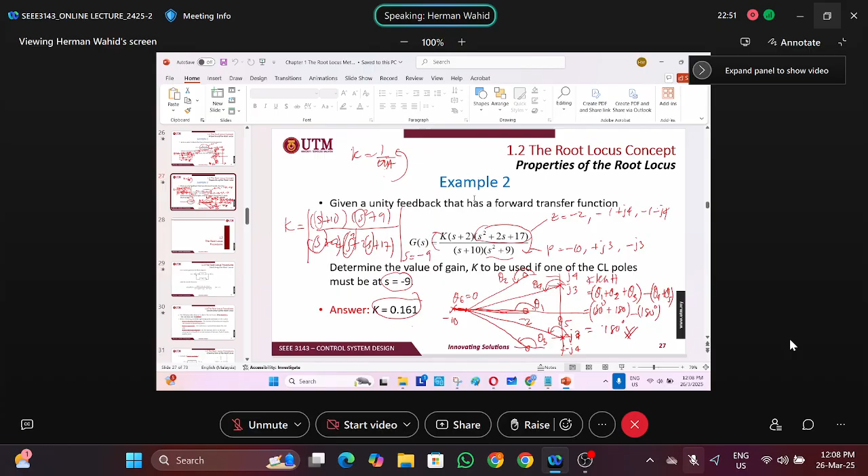Okay, so we continue with the real topic for this chapter, which is we're going to do the sketch of the root locus. The sketching is divided into two parts.

It has two parts in the root locus: one is the sketching part, and the other part is the refining.

In sketching, we have 5 rules that need to be followed. And for the refining, we have another 4 rules - rule number 6 to rule number 9.

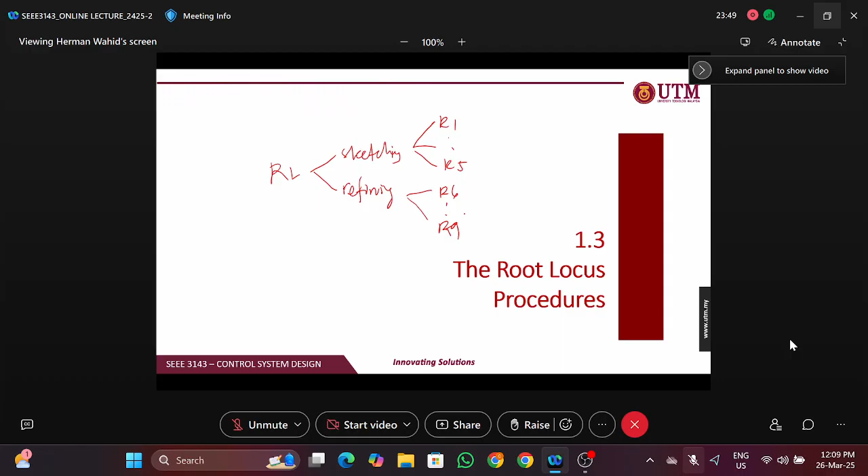So we start on sketching the root locus. Let's consider this closed loop block diagram, or the feedback block diagram. So we have the forward transfer function as KG and the feedback as H(s), right?

And the transfer function can generally be written like that, where in the numerator part we have the gain K and also a list of the zeros: s plus zero number 1, up to s plus zero number m. The numerator is for zeros and the denominator is for the poles: s plus pole number 1, s plus pole number 2, up to s plus pole number n.

So the rule for sketching the root locus - we should make sure that the number of zeros should be equal to or less than the number of poles. It cannot be that zeros is greater than the number of poles; at most it should be exactly the same number.

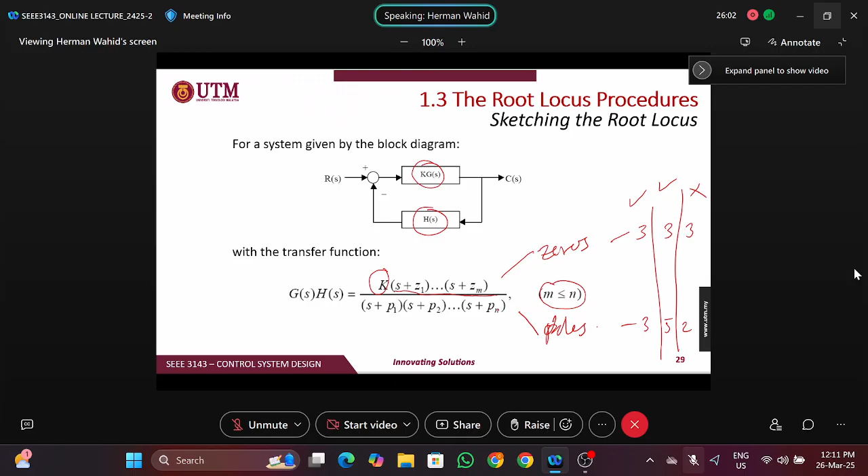So, as I mentioned, we have two parts: one is for sketching, and the other is to refine the sketch that we have drawn. We start on the first three rules.

So rule number one states that the number of branches is equal to the number of closed loop poles. For example, we have the forward transfer function given by K over s plus 2, s plus 3, s plus 4.

s plus 4. So we know that the number of poles is equal to 3, and basically this is for the open loop transfer function.

If you convert it into the closed loop transfer function, we should use the KG divided by 1 plus KGH formula.

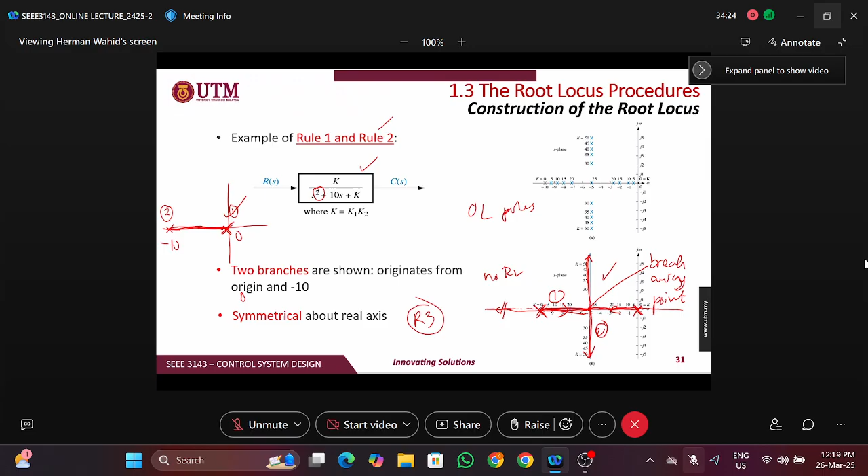So the statement from rule number 3 says there will be a segment at the left of the odd number. In this case, the odd number is located from this pole at the origin, so from here to the other pole, there will be a segment. This segment becomes part of the root locus. That's why the root locus goes through this segment rather than going to this side, because on this side there will be no root locus.

Let me look into another transfer function to represent rule number 3. In this case, we have zeros at -3 and -4, and poles at -1 and -2. If we locate all those zeros and poles on the axis, we have poles at -1 and -2, and zeros at -3 and -4.

Okay, represented by the circle. So if we count this, all the poles and zero on the real axis, we should start from the right: 1, 2, 3, 4. So that means we should consider there will be a segment or a few segments at the left of the odd number.

So we have 1 from this odd number. So it goes to the next poles. It doesn't mean it should go to the poles. Sometimes it goes to the zero here. But for this case, we have another pole at the left.

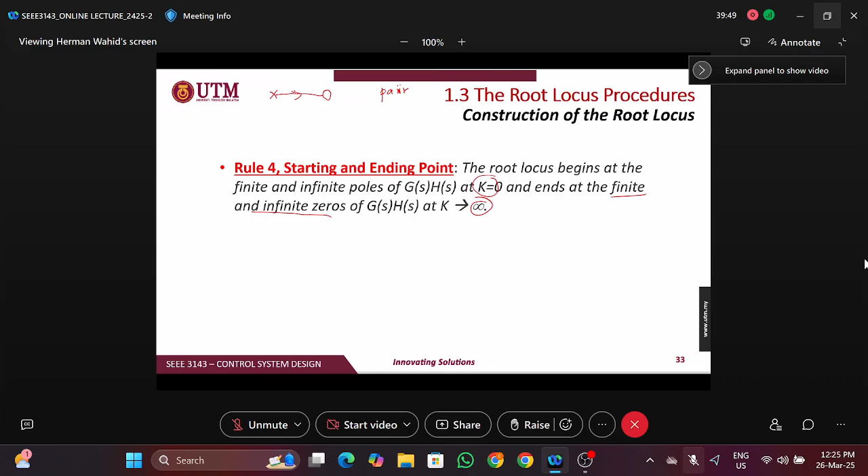Okay, for this case, it is a complete pair because we say that it is a finite pole, and this is also a finite zero. What does it mean by finite here? So this is only one.

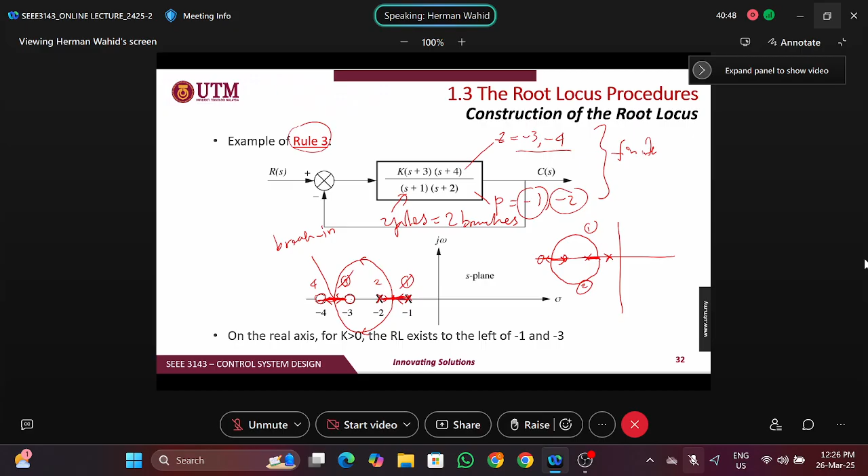Finite pole and finite zero means that - if you consider back this one, so here all these poles and zeros that exist on the transfer function, we consider as finite poles and zeros. Okay, and the poles or zeros that do not exist on the transfer function, we call it infinite.

Okay, so as I said just now, this is the first possibility. The second possibility could be from the pole and then it goes to the zero at infinity. So it doesn't have the finite zero here. So this is infinite. Okay, but the poles here are still finite poles. So that is the possibility.

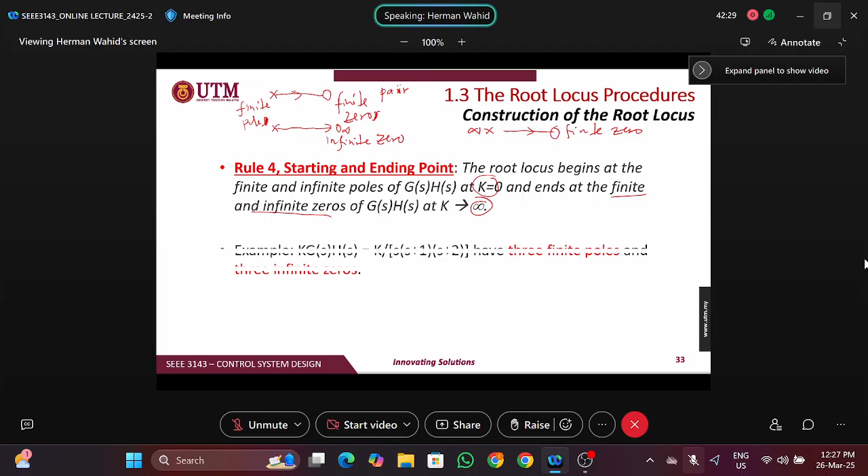Right. Later we'll look into an example to be more clear on what this means here. Okay, so we consider this transfer function: k over s(s plus 1)(s plus 2).

So we have nothing at the numerator - no finite zero. Okay, we have no finite zero, because we don't have anything at the numerator, but we have finite poles here. Okay, where the finite poles are located at 0, -1, and -2.

Right? So where are the infinite zeros? Okay, rule number 5 will help us to locate these zeros at infinity. Okay, all these poles still have their own pair, but in this case, all those poles are connected from the infinite.

Sorry, it is not like this. Okay, so this pole goes to the finite zeros. This pole also goes to an infinite zero. This pole - there are no finite zeros appearing here. Okay, so the zeros are located at infinity.

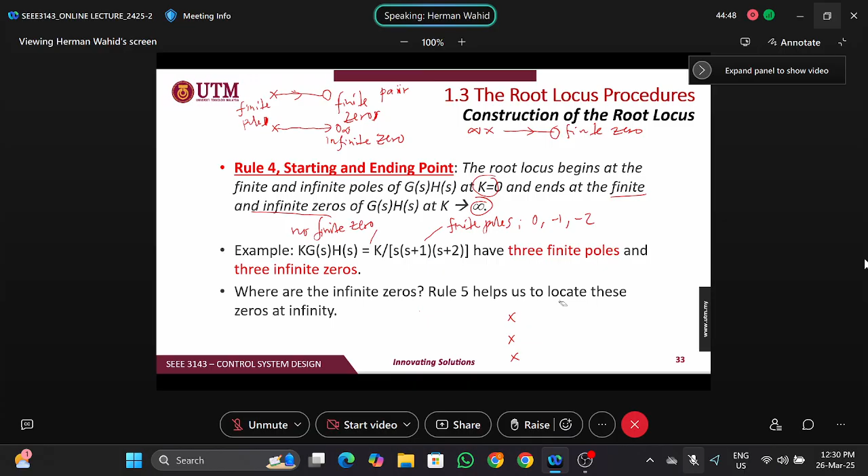Okay, this I have explained just now. We have this root locus. Okay, so one root locus goes like this and ends like this, and the other one goes like this and ends at the zero. Okay, so the poles go to the zero.

The poles go to the zero, and all those zeros and poles are finite zeros and poles. Okay, the root locus begins at the finite poles, which are -1 and -2, and ends at the finite zeros, which are at -3 and also -4.

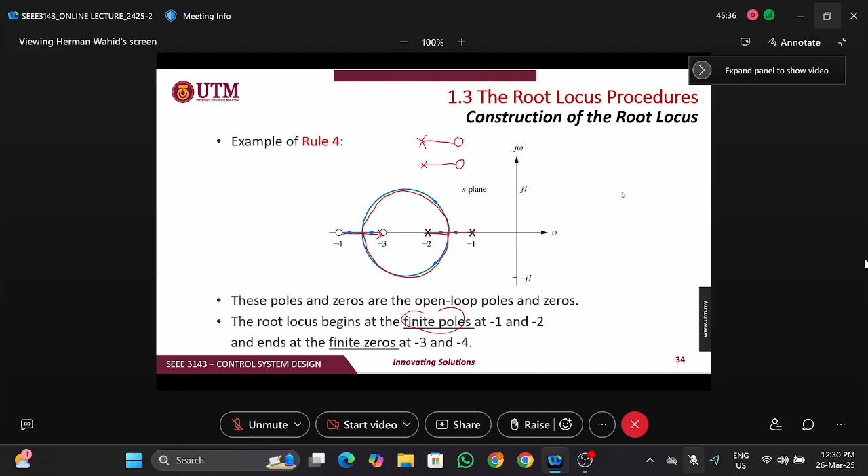Okay, so just now we are confusing on what is infinite zero and infinite poles. Rule number 5 will help us identify where the location of that infinite zero and poles are.

So rule number 5 says that the root locus will approach a straight line as the asymptote line when the root locus is approaching infinity. So basically, rule number 5 is to look at the asymptote.

The number of asymptotes is the number of poles minus the number of finite zeros. And the real axis intercept is at sigma A, where sigma A is given by the summation of finite poles minus summation of finite zeros, divided by the number of finite poles minus number of finite zeros, which equals the number of asymptotes. The third one is the asymptote angle, given by theta A equal to (2k+1) times pi, or it can also be written as (2k+1) times 180 degrees divided by the number of asymptotes, which is actually equal to this formula.

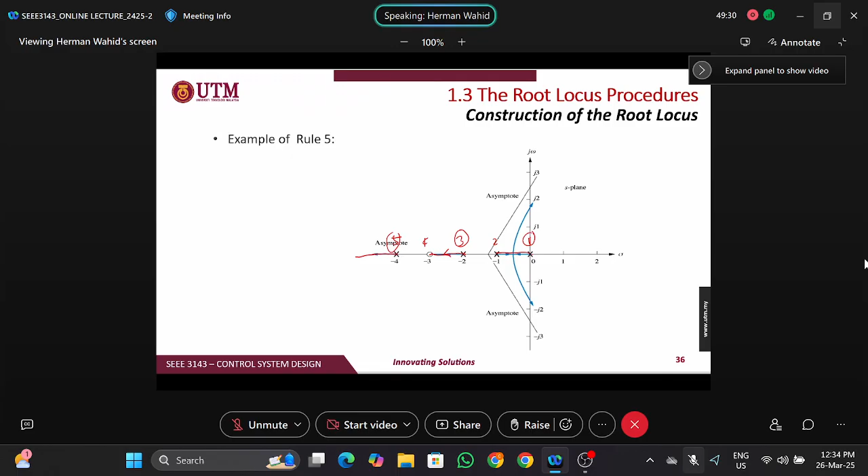We can see that this root locus is already completed, because we go to the left. The root locus is already completed because the pair is already equal, meaning the number of poles equals the number of zeros here, 1 to 1. So this one is completed. And this one is probably completed because it's not going to return back here.

It should go to the left toward infinity zero. So from this pole, as there is a segment here, it goes to the left and approaches zero at infinity. So this is branch number 1, this is branch number 2, and branches 3 and 4 are here.

From these two poles, one will go to the right because the segment is in between here, and another one goes to the left. So this is considered branch number 3, and this is branch number 4. They meet at this point here, so this point is called the breakaway point.

It breaks away, one goes to the upper side, and it tries to make a curve until it crosses at this j-omega crossing, and it exits toward the right side. Okay, supposedly not like this, it goes like this.

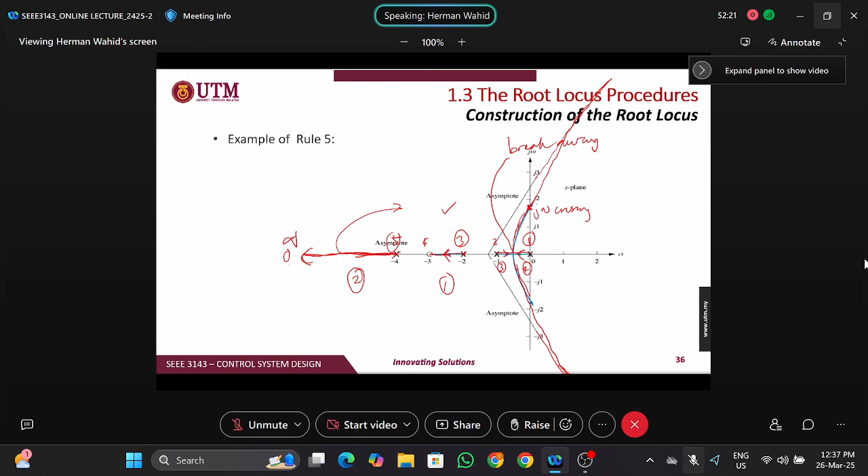Similarly for this one, let's say I extend this line. So this root locus goes to the right, and then finally tries to reach this asymptote line and follows this asymptote line. Okay, so that's what is mentioned by rule number 5.

That's what we try in this example, example number 3. So from here, let's try to identify rule number 1 about the branches. So how many branches do we have? 4, following the number of poles: 1, 2, 3, 4. So there will be 4 branches of the root locus.

Rule number 2 says symmetry, let's leave that for a while. Rule number 3, there will be a segment. So let's draw and place all those poles and zeros: 0, -1, -2, -4, and a zero at -3.

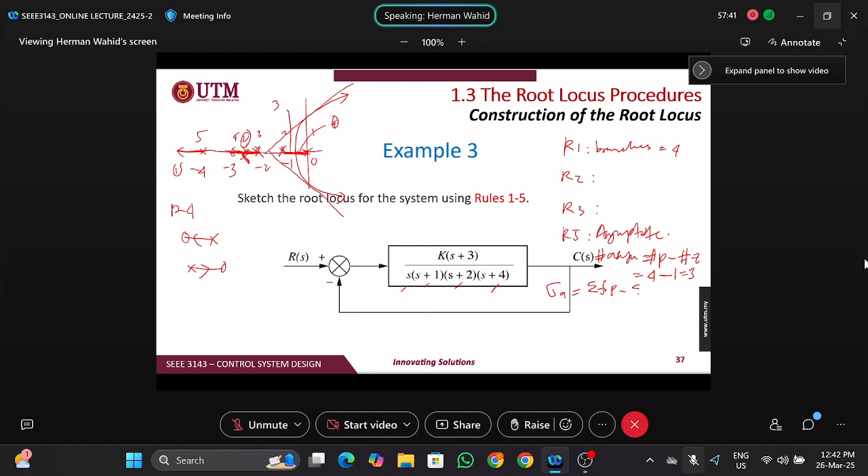The second one is, where is the location of the asymptote point? The sigma A is equal to the summation of finite poles minus the summation of finite zeros, divided by the number of asymptotes.

So in this case, we have the finite poles. What are the poles that exist from the transfer function? We have 0, plus -1, plus -2, plus -4, and minus -3, divided by the number of asymptotes which is 3. So overall we have, -4/3, which is -1.33 something. Okay, so this is the sigma A, or the asymptote point.

The third one is the angle theta, given by 2k plus 1, times 180 degrees, divided by number of asymptotes. So we have 2k. So what is actually k that needs to be used here? Okay, k is an integer number.

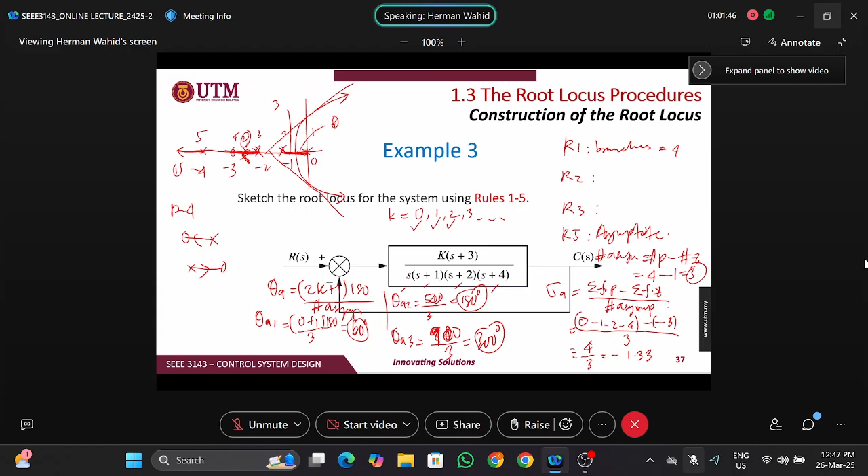Right? Theta A3 is, if you choose 2: 2 times 2 plus 1 is 5, times 180, which is 900, divided by 3, which is 300 degrees. So we have 3 angles here: 60 degrees, 180 degrees, and 300 degrees.

So just now we identified that the asymptote point is located at -4/3, or equal to -1.33, which is somewhere over here. Okay, so this is the starting point of the asymptote, all those asymptotes should start from this point. And we have 3 angles theta, which is 60, 180, and 300.

So if we consider this reference point, 60 degrees is started from here to here, so this is 60 degrees. 180 degrees from here to here. And 300 degrees is basically -60, or you can take the full one, here. Okay, this is for 300 degrees.

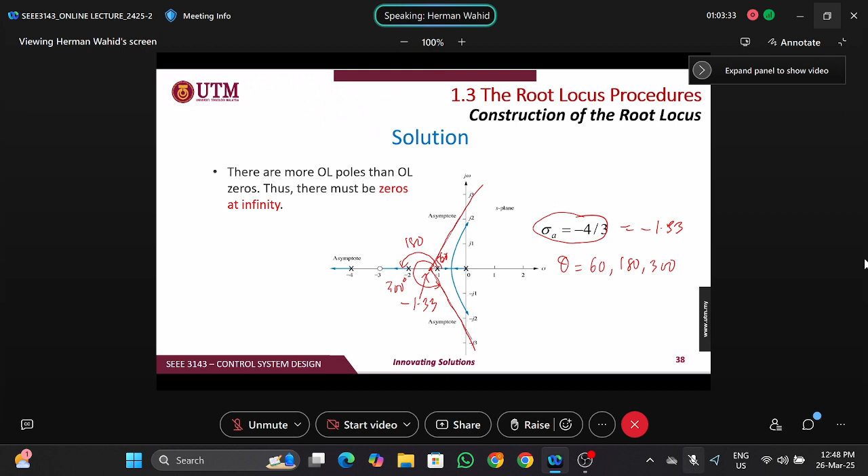Okay, then we draw the line. This is the asymptote line for this angle, 60-degree angle. We draw the line for 300 angle. So this is asymptote number 2. And the third asymptote is just 180 degrees. So the asymptote is like this.

So meaning that the root locus should lie on this asymptote line. As we can see here, just now we have settled with this one. This pole will go to this zero completely. And this pole here, just now we're unsure where it should go.

Of course, we know that there will be a segment here, but will it go straight to the left, or somehow go back, returning back, make a U-turn? But for this case, it's not going like that. It should go straight to the left because it is following this asymptote line just now. It is 180 degrees. So from here it goes to the left, to the infinity point, infinity zero.

For the other two branches here, as I mentioned just now, when it breaks away from this point, it will not go like this or like this, because it is breaking the rules. It will not cross this asymptote. It should finally follow this asymptote line.

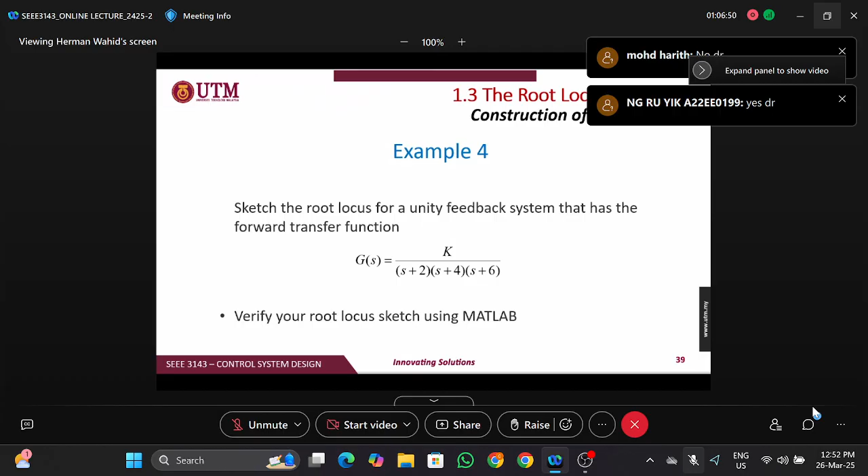Okay, thank you. So let's look into another example here. All right, good, thanks. Okay, these are quite similar examples.

Sketch the root locus for the unity feedback system that has the forward transfer function. So we need to go through all the rules from rule number 1 to rule number 5.

Okay, so we first identify the zero. We don't have any zero, not available. We have the poles located at -2, -4, and -6. If you try to locate all those poles and zeros, we don't have any zero, and -2, -4, -6. Those are the poles.

Then we have segments here, 1, 2, 3. So we have a segment at the left of odd number, and the odd number here, so we have another segment. We should understand from here, we can imagine that there will be a root locus here to the left, and there will be a root locus in between here, whether it goes to the upper side perpendicular or it goes to the right, crossing the j omega crossing point.

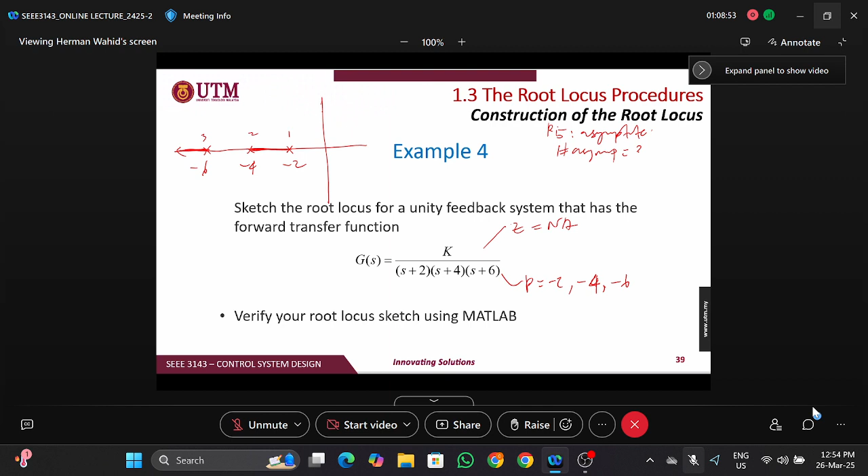Okay, let's identify next the asymptote point. This is rule number 5. So for the asymptote, the number of asymptotes equals the number of poles, which is 3, minus zeros, which is 0, so 3. So we still have 3 asymptotes, similar to the previous example.

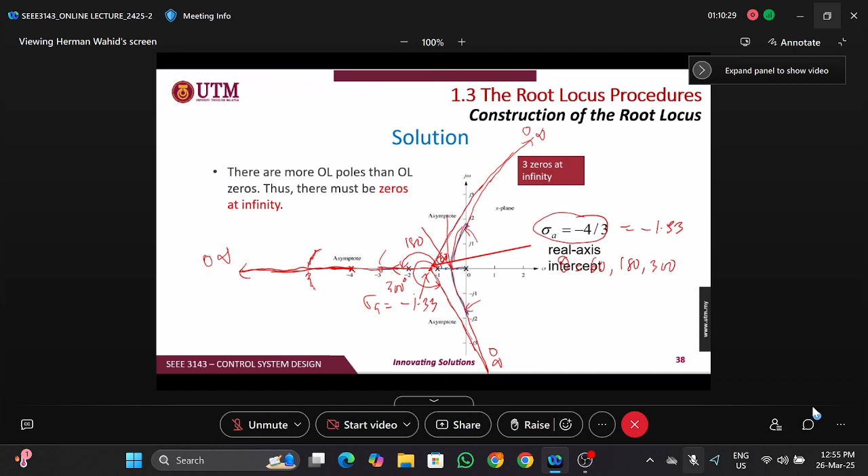Okay, so for now, the sigma A point is exactly located at one of the poles' location, which is -4. The previous one, we have the asymptote point, sigma A, at a different location, not part of the poles' location. But for this one, the asymptote point is exactly also located at the same point as one of the poles, which is -4. So from here, we draw the asymptote line at 60 degrees, the -60 degrees.

This is 60 degrees, -60 degrees, and 180 degrees. This to the left.

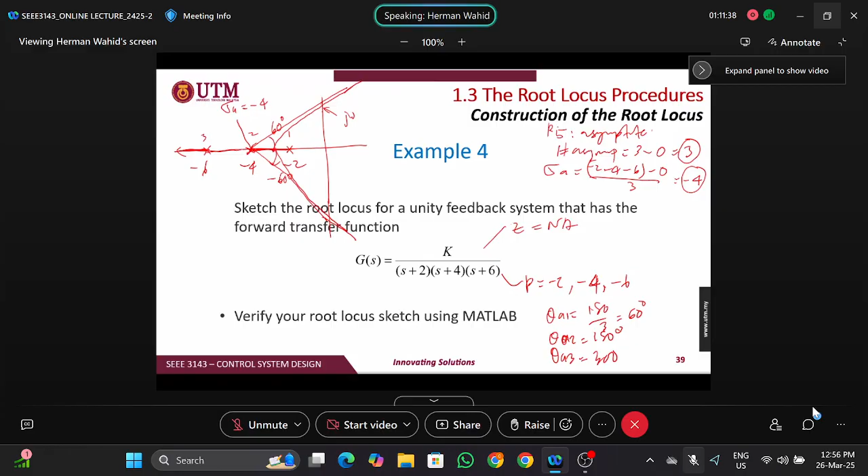Okay, so the rule is still the same. In between we have a segment, then we know that we have a root locus in between, and it will break at the one point here. Okay, and it goes to the right, crossing the point at the j omega, and finally is following this asymptote line, also similar to this one, following the asymptote line. Okay, the solution is quite similar to example number 3.

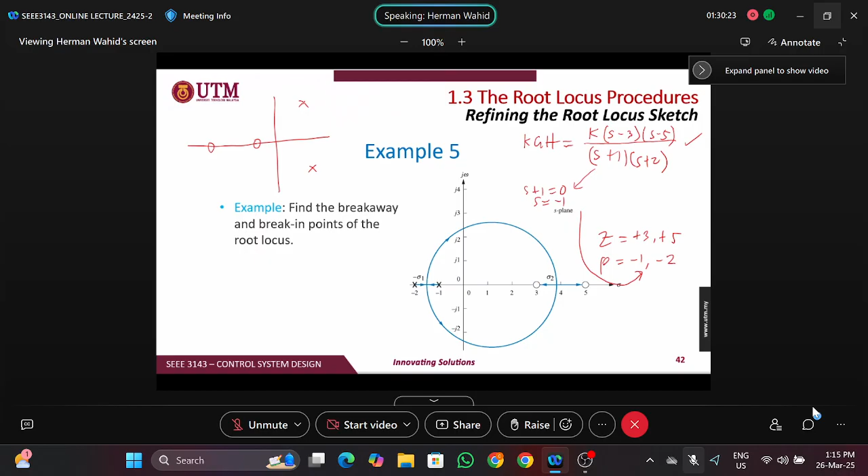Let's say I have another example. The poles are located like this, and the zero is located here. And finally the locus goes like this, goes like this, and finally ends at the zero. It's always a typical question in the test where you are given the root locus like this. You have to first identify what is the transfer function, so you should be able to develop the transfer function first.

For example here, it involves the complex number, the complex pole. Let's say this is 1, this is J1, this is negative J1, this is -1, this is -2. So we have two poles and two zeros. The zeros are -1 and -2. So if you put it into the transfer function, KGH is equal to K times s plus 1, s plus 2, divided by s. From here we need to make it s minus 1 minus J1 and s minus 1 plus J1.

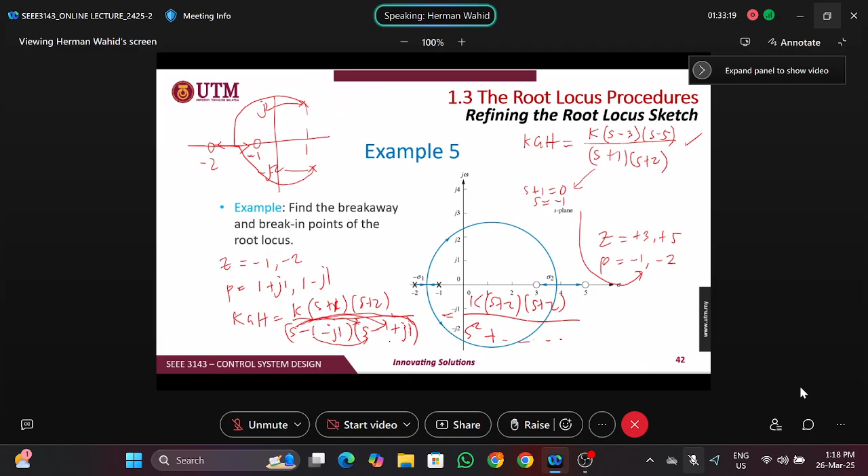Okay, j times j squared, and somehow you can try it. If you want, you can try it together, but it takes some time. I would like to finish with this part first.

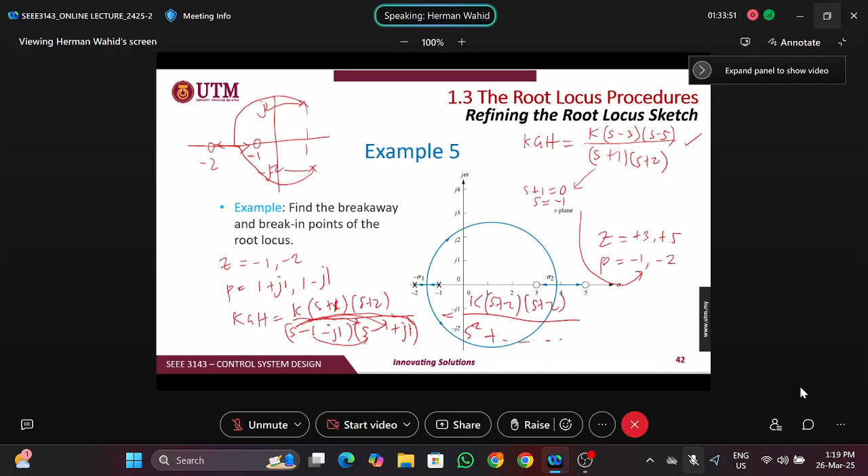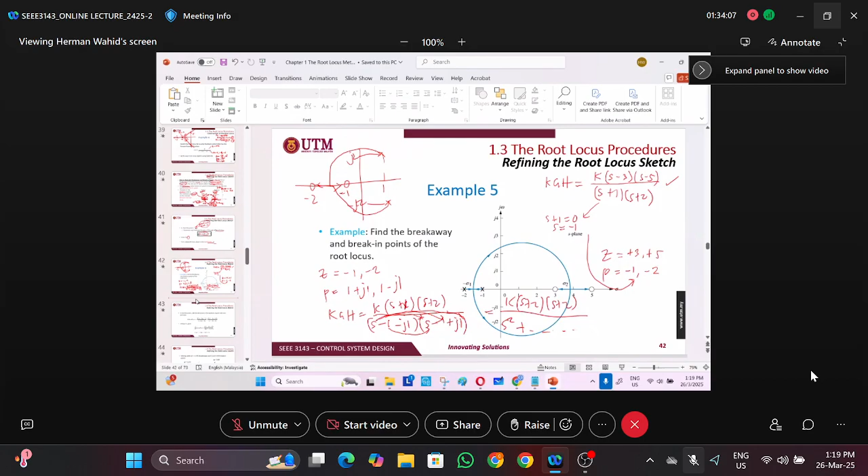Let's solve this one. Just now we have this transfer function. From this transfer function, okay, so we have this transfer function. Copy this one. Okay, so just now we stop here. So from here we should expand it first. So we have s to the power of 2 minus 8s plus 15, s to the power of 2, 3s plus 2.

Okay, so just now, in order to get the breakaway and break-in point, we should use differentiation. So we differentiate d over ds of g, basically kgh, and we set k equal to 1.

So in that case, we are trying to differentiate this function. But this transfer function involves the s variable at both parts, numerator and denominator. So the easiest way is if we can define this as u and v, so that we can differentiate using d over ds of u/v, which is equal to v du minus u dv divided by v squared. I hope you still remember this formula.

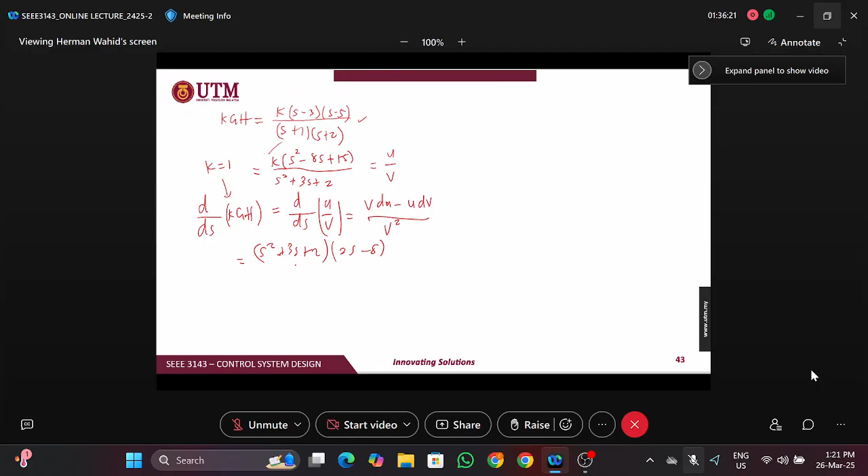So we proceed: s squared plus 3s plus 2, this is v. Du, we differentiate this one: 2s minus 8. And divided, oh haven't finished, minus u. U is s squared minus 8s plus 15, times 2s plus 3, divided by v squared. You can write it, but finally it's going to be cancelled, because everything here will be equal to 0, then we can cancel the denominator.

Okay, so you need to expand it carefully. So we have 2s cubed and blah blah blah, and finally you will get this mathematical expression: 11s squared minus 26s minus 61 equal to 0.

So from here, using your calculator, you can get the roots from here. Then you have two numbers, which is 3.82 and negative 1.45. Where the s that we obtain from here is equal to the breakpoint.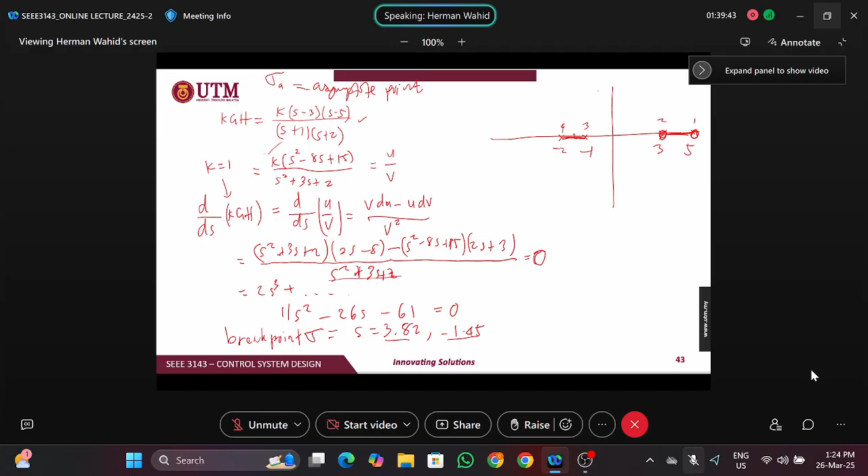We have a breakaway point from here, and it tries to find the zero at the right side, and finally it ends at the zero. Similar to this one, another branch goes to here from the downside, and meets at this break-in point and finally ends at the zero.

What we're trying to identify just now is the location of this breakaway point and this break-in point. So according to the roots we found just now, we have -1.45, which is actually exactly located in between these 2 points - so this is the breakaway point here. And the other value is 3.82, which is in between these two zero values - so that is the break-in point.

Sometimes we have to solve for probably a third order here, and we get 3 values, but from the sketch we only need one point. So we have to choose from the 3 possible values here, matching to the location of our sketch. For example, there's only one breakaway point here, but it involves s to the power of 3, then we have 3 numbers. So from those 3 numbers, we choose the one that is suitable to be placed in between these 2 poles - we have to carefully select. But for this problem, it is exactly the point we want: we have s to the power of 2, then we get 2 values, and we can match also to the sketch that we have done here.

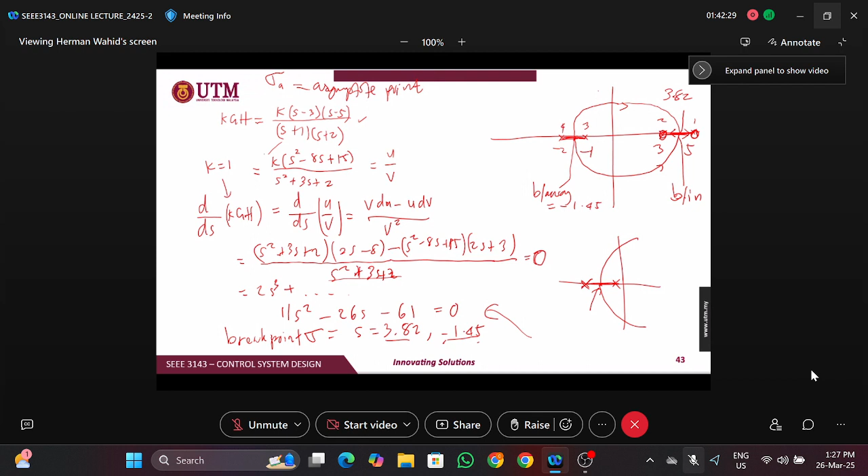So this is the solution. Okay, I would like to proceed with this one for the j-omega crossing.

The j-omega crossing is nothing new for you, actually, because you have gone through this route before. When we were checking on the stability of the system in course 3133 last semester, we used the Routh-Hurwitz criterion to solve for stability. But now we're trying to use this RH criterion again to get the value of the j-omega crossing.

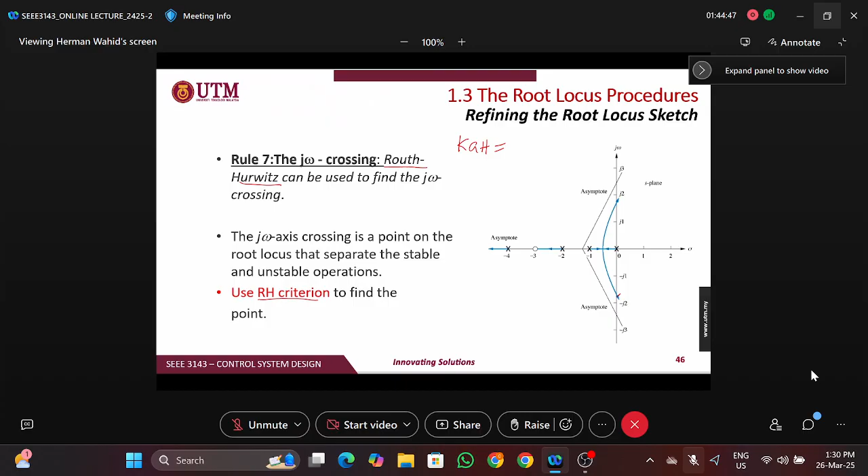This is the last part, rule number 7, then we dismiss. So this is the last part, it's nothing new for you, we just need to make some revision over here.

So we have K(S plus 3), and we have (S plus 1), (S plus 2), (S plus 4). So this is what you should be able to construct from the root locus that has been given here. You should be able to construct this. Right? So from here you can expand it.

And finally, if you expand this one, you're going to have S plus 3 divided by S to the power of 4, because we have 4 poles here, plus 7S cubed, 14S squared, plus 8S plus K. This is still an open loop, sorry. Suppose 7S cubed, 14S squared plus 8S.

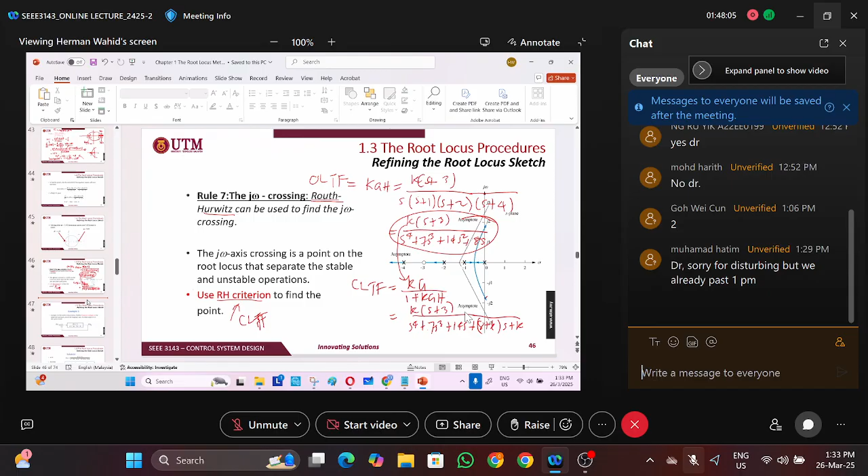Okay, so from here we construct a Routh-Hurwitz table. We have S to the highest order, followed by S cubed, followed by S squared. I put some space here to make some calculations, and finally S to the power of 0.

Okay, so from this denominator we plug in all those coefficients: 1, followed by 7, followed by 14, followed by 8 plus K, followed by K — actually this is not K, this is 3K. Sorry, I made a mistake. So this is 3K, this is 0. Alternately, we key in 1, 7, 14, 8 plus K, 3K, and since we don't have any more numbers, we just put 0.

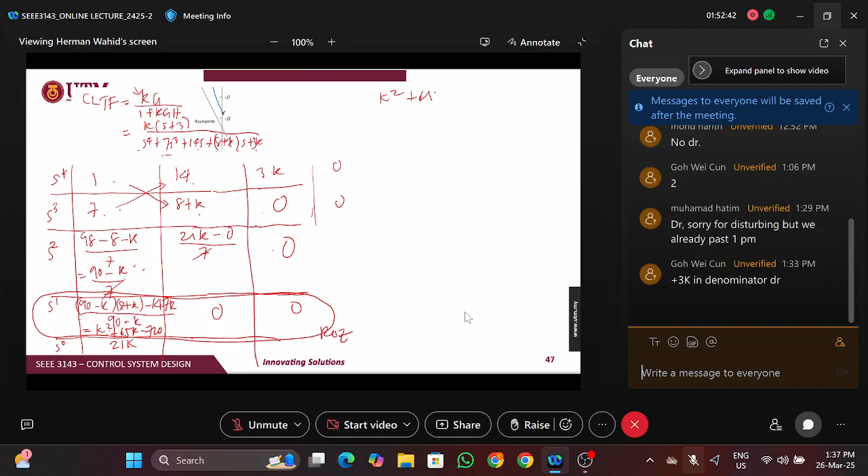Okay, so from this table, we know that the row of 0 should happen over here at the odd number. Okay, so this is the row of 0. So everything at this row of 0 should equal to 0: 65k minus 720 is equal to 0.

Then we can solve for k value. So k is equal to 9.65 by using your calculator, and -74.65. But this is not possible, because the k value, the gain, should be a positive gain, because in the root locus the k is started from 0 to infinity. So this is not possible, we can cancel this one. Then we choose this one as the value of k.

So in terms of the stability, the system will be stable at this region. So you have done this one in previous course, it should be from 0 to 9.65. So this is the stability range, and the system is not going to be stable when k is greater than 9.65. So this is just a revision.

But we extended it by looking at the previous row, and then we construct the auxiliary equation. So P(s) is equal to 90 minus k, and s squared, because this belongs to s squared, plus 21k s to the power of 0, equals 0.

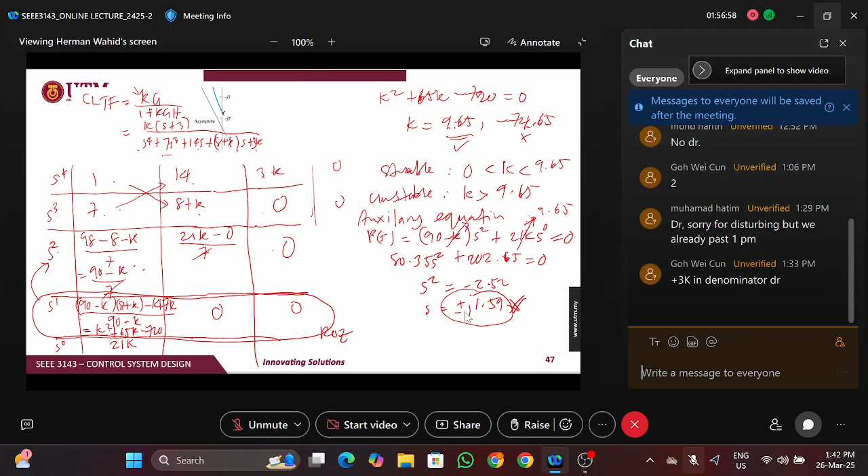Okay, so the solution also here, you can refer it back, can make a practice from this one. Okay, make sure that you are able to solve this Routh-Hurwitz table here, and how you construct this, putting all this coefficient from the transfer function, how you fill in this table, you should master it. You have done it before, then you need to use it again now.

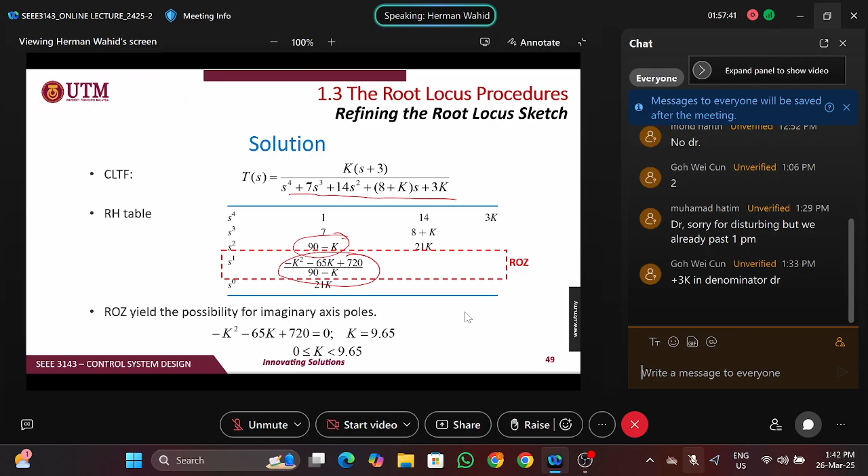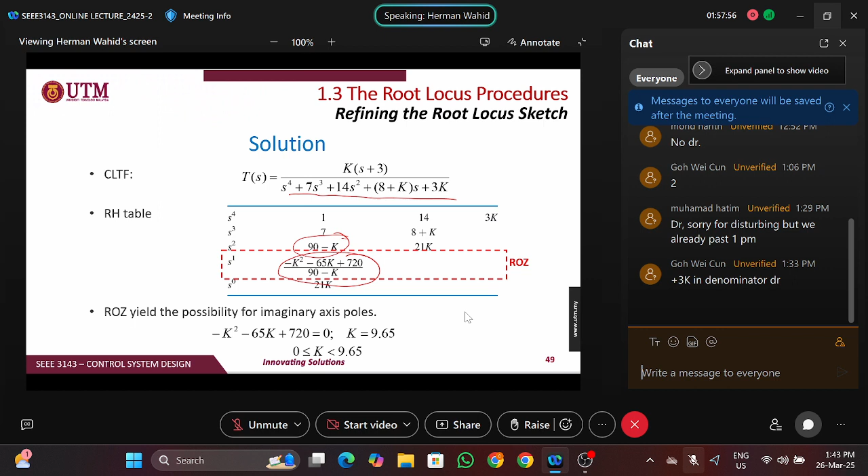Right, so I think that's it for today, so we dismiss the class up to here. Okay, is there any questions so far? So we already covered up to rule number 7, we just have one rule remaining, which is rule number 9. We have another 2 rules actually: departure angle and arrival angle, and also the gain adjustment. We have covered up to rule number 7. Any questions?

Okay, so far so good.